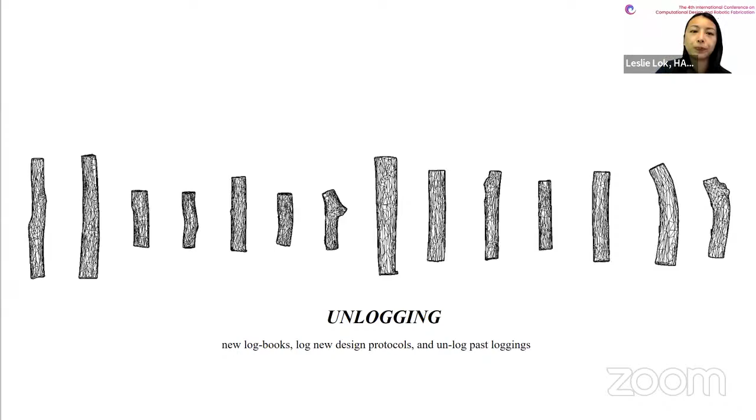And I think new material and design practices are needed to address climate change as one of the most pressing problems of our generation. And moving forward, architects, designers, and researchers need to develop new logbooks, log new design protocols, and fundamentally, in some way, unlog our past loggings in order to move towards a radically more sustainable and less wasteful building culture. So this environmental paradigm shift is accompanied by considerable design opportunities.

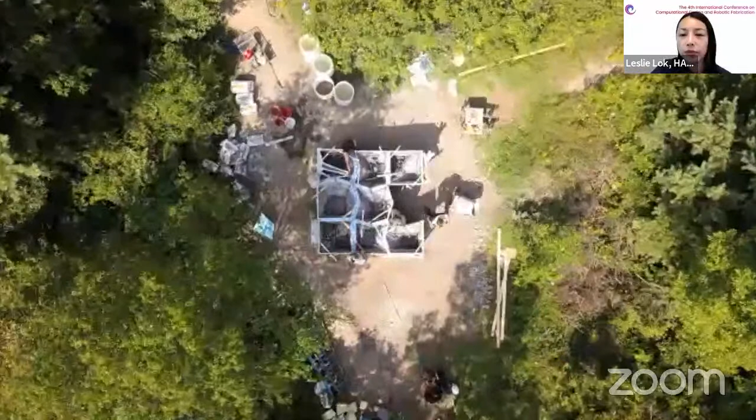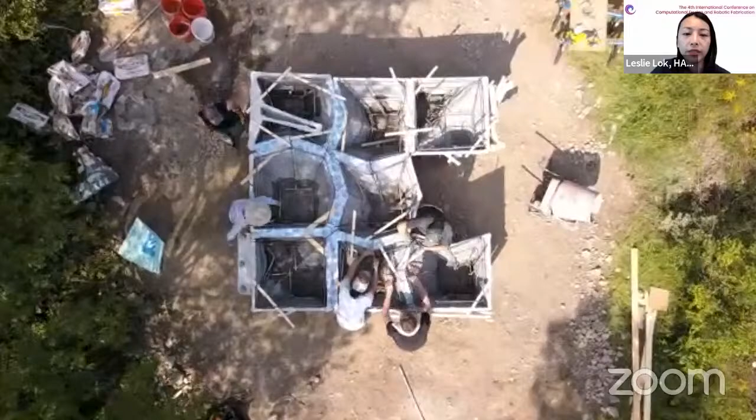We believe that the issues of making and forming are fundamental to how we operate as HANNAH. The various projects I present today are seeking to inform form through a variety of methods of production, from digital design, fabrication technologies, facilitating new material methods, to tectonic articulations, environmental practices, technological affordances, and architecturally expressive forms of construction. So in the past few years, as Philip had mentioned, we have been very productive.

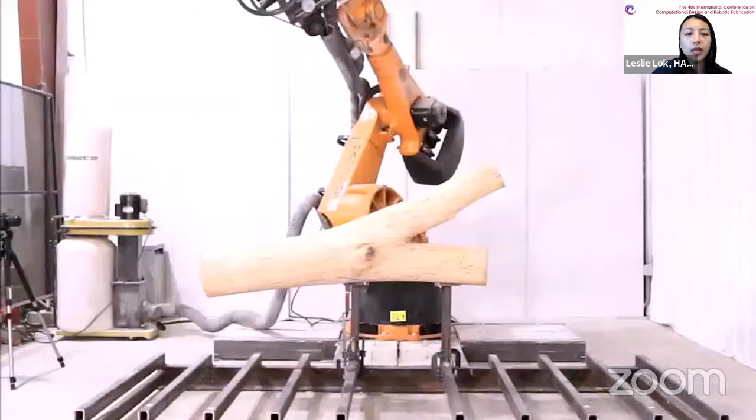We created open source construction machines, which we argue inevitably affect how we think and design through making. So in our work, we aim to mine that tension between the machine means and architectural ends. And we built a small infrastructural framework for architectural exploration across scales, starting from the design of tools to prototypes and installation into a small building. In this process, just like the robot in this video, we have been trying to unlog our own architectural preconceptions and expectations.

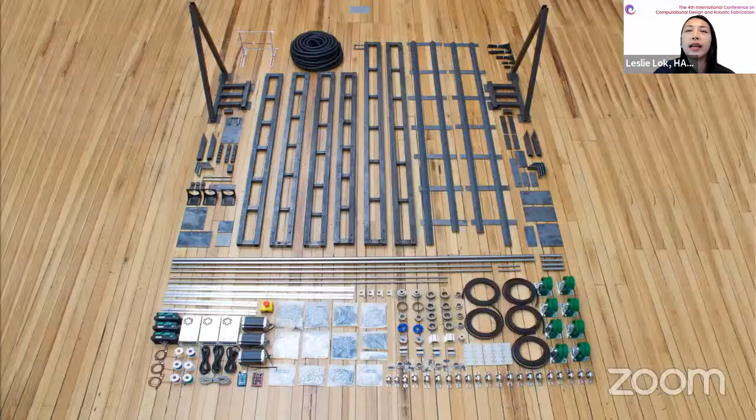And I'll start really quickly with just the tools of making. At HANNAH and our labs, we build our own tools, and these tools inform the designs and how we log our design. So when we started this work, we had to be inventive and build our own machinery to do the type of research that we want.

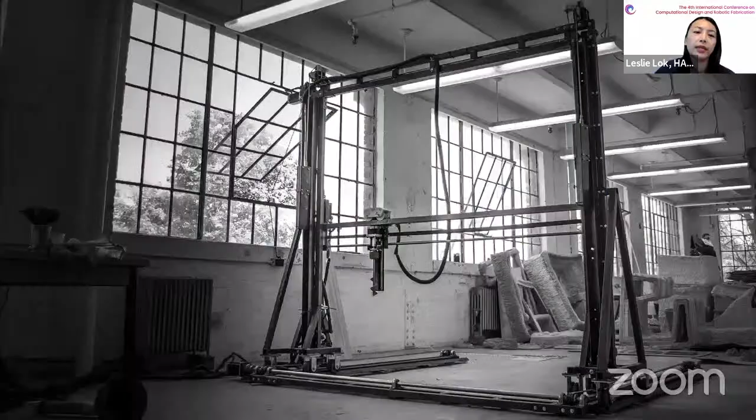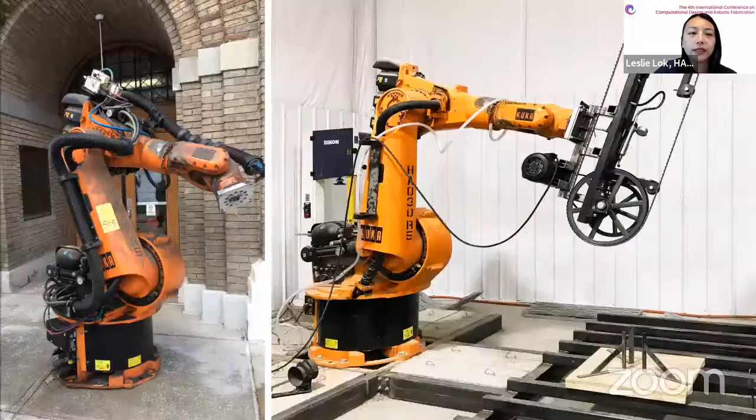And we also tried to buy a robot. As it turns out, one can go to eBay and purchase a KUKA KR200 for $8,000. It is not free, but considerably cheaper than buying a new robotic arm. And so for us, similar to the printer, it requires a certain level of hacking. And for us, this robot enabled us to have another technological means to inform form and new material.

So the first two projects I'll talk about focus on using the printer for 3D printing concrete. In additive architectural elements, we discovered that the 3D printer, a machine which has long been characterized as characterless because it can presumably print anything, is in fact exactly the opposite. It has plenty of character in what we like to call productive constraints. And most of these constraints are informed by concrete rheology and gravity, which we call the two frenemies of concrete 3D printing.

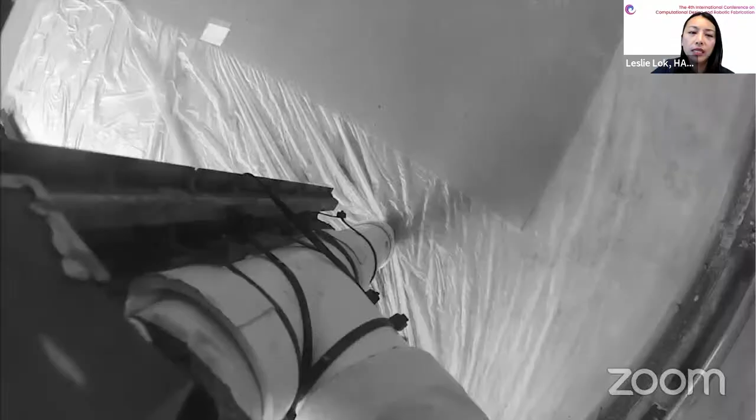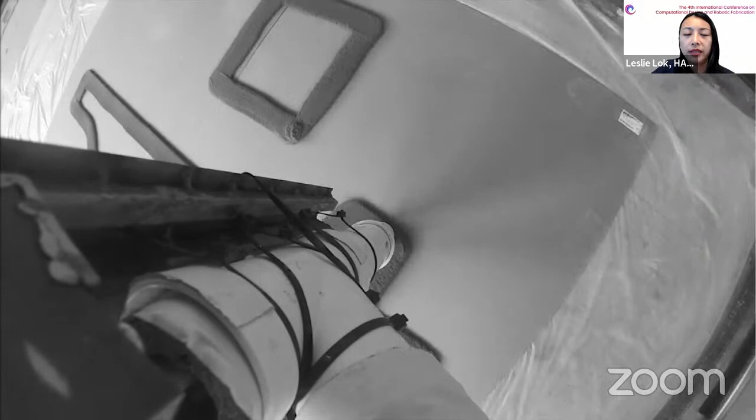Initially, our interest is in the following process. Like a three-dimensional drawing, the machine horizontally deposits one line after another. If the lines are shifted through corbelling, then it creates a spatial form. And so we find that in this very simple process is the complex language of concrete printing. In this project, our main design and research questions are: what is the architecture of 3D printed concrete? And how can materiality and the unique fabrication opportunities and constraints of the tools inform the design?

So we started this project in 2015 and really got the mixture in 2016. So it happened quite many years ago. Building the machine was the easy part, but with the aim of finding out what is intrinsic to the additive manufacturing process, like most people and most labs, we had to go through dozens of failures to understand the material's tolerance and its urge for imprecision.

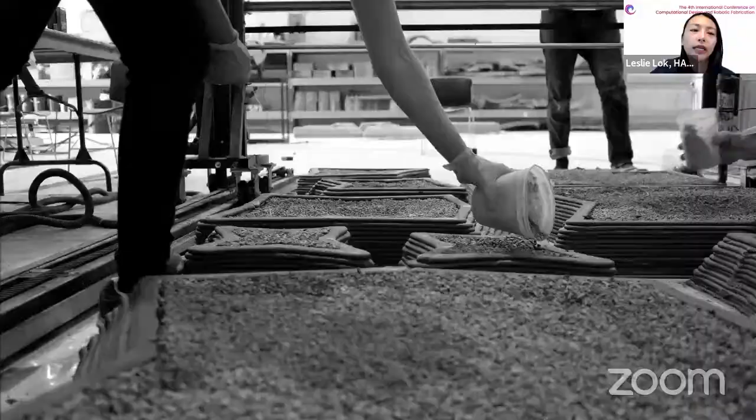Also, when printing in concrete, the same rules apply as in the small desktop 3D printers, but gravity here takes on an altogether different role in the process. So cantilevers have to be carefully constructed, new support material strategies have to be developed, and tool paths have to be manipulated. So in this image, you see where we actually used a reusable gravel method to create temporary supports.

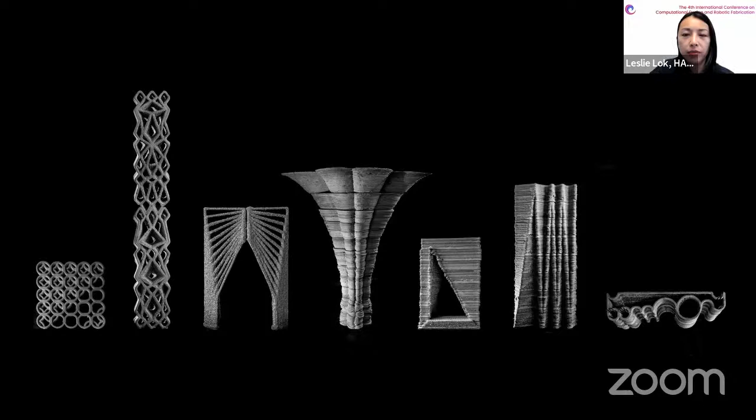From the design point of view, this project aims to reveal the 3D printer's highly idiosyncratic architectural tectonics and narratives. So we chose prototypical motifs like floor, column, door, window, wall, ceiling, and began to strategize how the simple layering of concrete and the act of corbelling can suggest new strategies for building. So in the first element, working with the constraints of gravity, the mushroom column plays with the cantilever over support material by printing upside down.

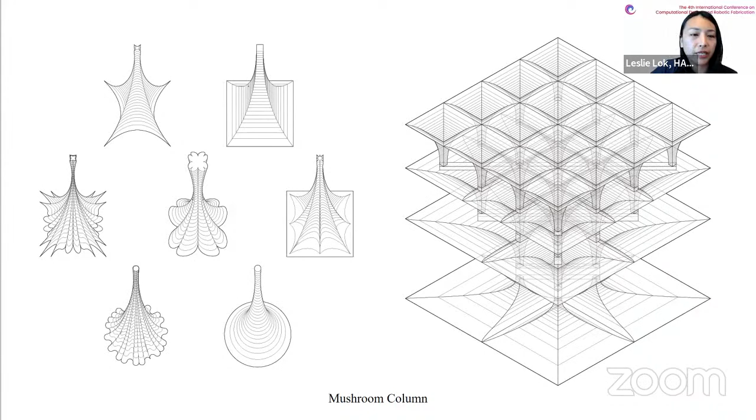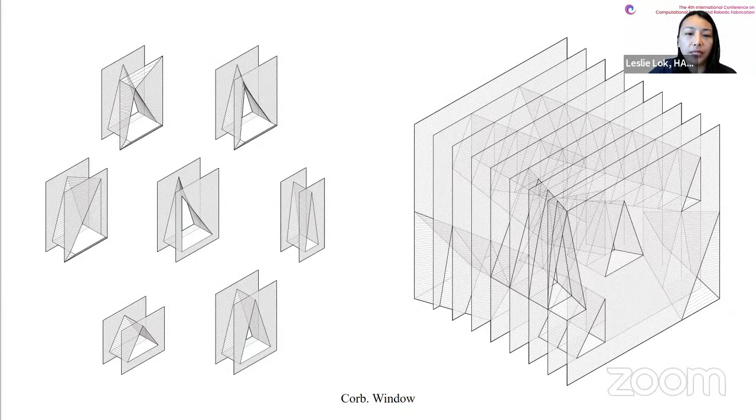And you see here with the horizontal striation, it results in a structural assembly that can seamlessly transition between the vertical and the horizontal. In the 3D printed structure, all common architectural motifs and building components must be rethought to fit the logic of layer construction. For example, a printer cannot print in mid-air. Therefore, the otherwise simple task of creating a rectilinear window opening in the wall becomes a de facto impossibility.

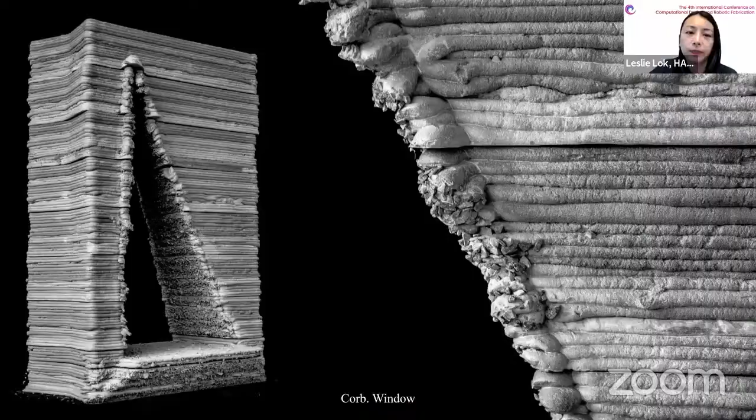So rather than drastically altering the process, stopping the machine to insert a beam, shortcomings become opportunities for design. And one logical consequence for the window is to cantilever incrementally and become a triangular corbelled arch. So suddenly, seemingly advanced technology relies on obsolete and archaic structural strategies such as corbelling. And that was a very exciting moment for us.

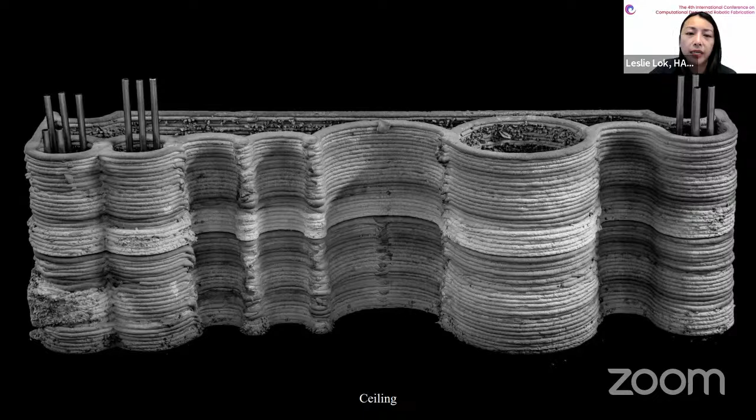Here you see the force column, printed in section, hints at the potential to deposit material where structurally necessary. And the Smart Poché Wall explores the manipulation of concrete density to optimize for structural performance and to be architecturally expressive in the wall assembly. The ceiling element is an expressive play on ducts for ventilation and reflectors for lighting. It becomes a type of performative poché for building systems.

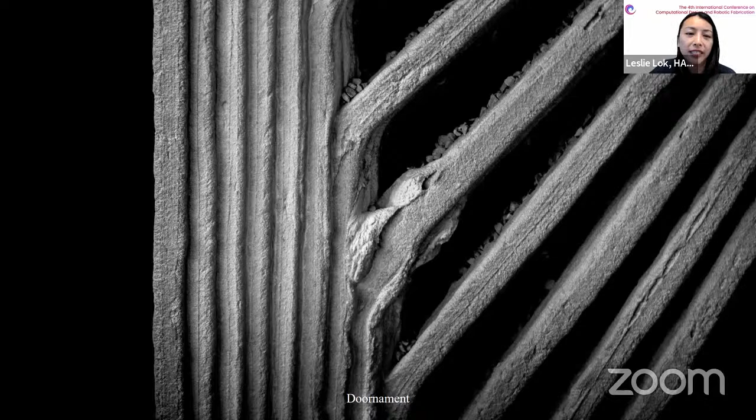The potential for excessive ornamentation is brought up in the door ornament. In the full-scale prototype, we were playing with the lamination of layers to create screen-like moments of transparency. So we see this manipulation of 3D printing rule sets as a tremendous opportunity where it requires the development of a new and different architectural language, which takes into account the limitations of the process as well as its performative advantages.

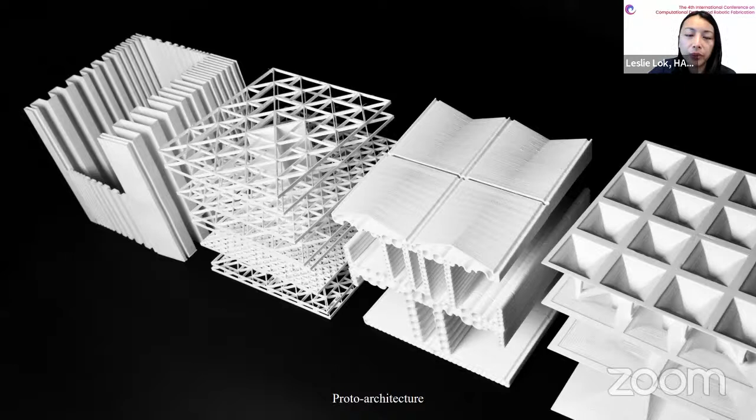There are certainly multiple narratives at play in this project, and we chose to present the work with a particularly speculative focus. We can also discuss the work in various other terms as well. From a technical point of view, there are multiple advantages to 3D printing, from construction without the use of formwork and radical mass customization to material savings for smarter construction.

However, there are severe shortcomings to working with concrete as well. The cementitious material itself has to change and become drastically more sustainable for 3D printing to become a viable future technology or current technology. So while our concrete projects exploit the design benefits of 3D printing, we as designers have a responsibility to dig deeper and constantly challenge the material we work with. And hopefully soon in the future, we aim to replace concrete with more sustainable alternatives.

And to conclude this project, I want to say that undeniably there's a certain formal agenda at play here. And that agenda is derived from highly deterministic bottom-up processes that are informed by the digital fabrication, and also top-down architectural decisions, which are perhaps harder to quantify and have something to do with our personal biases and design preferences. In other words, this is not a universal tectonic language.

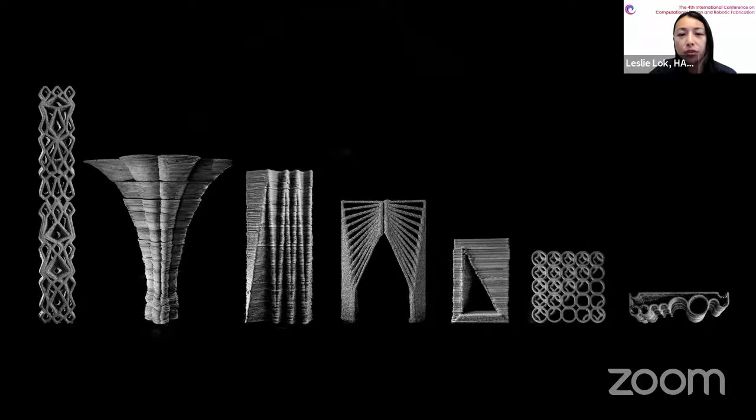We also try to test out ideas across scales, and we're quite interested to see how certain intellectual frameworks change and transform while translating from one scale to another. So the idea of robotic mass customization inspired our Rolling Stones project, which was a winning entry for the Socrates Sculpture Park and Architectural League's 2018 Folly competition.

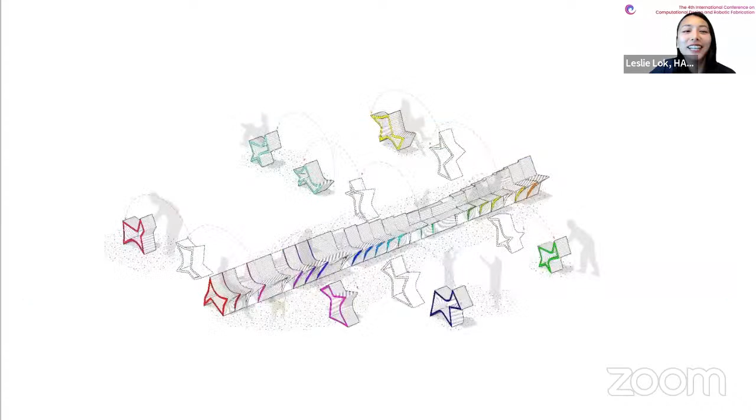The design is deeply informed by program, in this case, public seating. And the brief called for a design that could be movable by visitors and staff, but solid enough that people are discouraged from removing it from the park. So with concrete gravity working in our favor this time around, we got the second part covered from the get-go because they're hard to steal. Leveraging movement architecturally, the follies themselves, the chairs, the playful design encourages creative interaction and allows park visitors to discover a variety of seating.

Responding to the scale within the public park landscape, the Rolling Stones can form a long continuous bench object or aggregate into smaller benches or disperse entirely to form different size seating groups or solitary compositions. And 3D printing with concrete enables the creation of 25 affordable and self-similar, but ultimately entirely individual seats. And so no longer bound to the relentless paradigm of standardization, the 3D printing here opens the possibility for design freedom, customization. And as you can see in this photo, concrete is indeed hard to steal or roll, but with two people, it's actually quite okay.

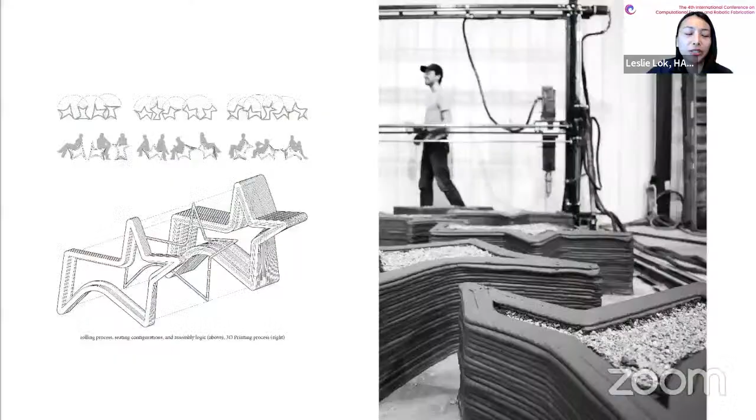The material used in the 3D printing process is Portland cement-based mortar, which is reinforced with nylon fibers, resulting in a strong concrete assembly. In addition, each seat is supported by 3 steel rebar profiles embedded within a double layer of concrete, as you see in the photo. And to enable the creation of some of their cantilever forms, the seat's interior is supported with a bed of gravel during printing. A layer of gravel remains imprinted on each chair's interior surface, giving it a geologic character, also an honest reading of the fabrication process.

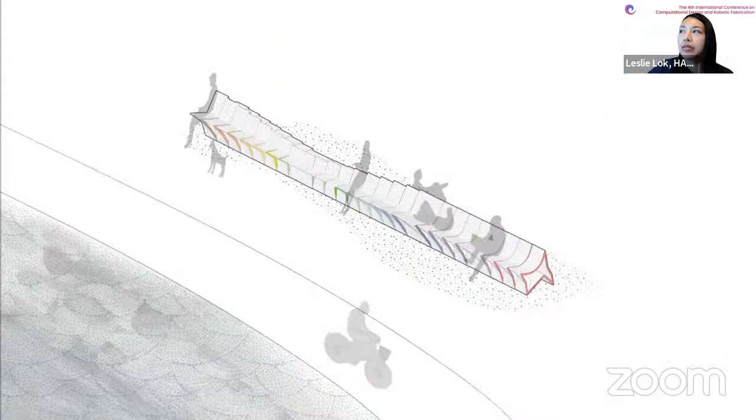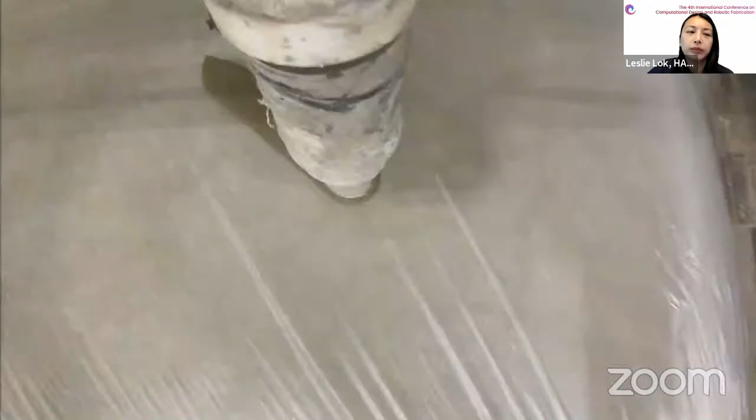And so here is a short video clip showing the making of the Rolling Stones from some of the initial prototypes that you see here to the material testing and fabrication process. And so the idea of the bench, the seating could be contextualized and used in different ways at the park. So the printing is, again, very simple, using the sort of singular extrusion layer by layer. And you can see that the printing itself is not an autonomous process, but rather it's like an interplay between the human and the machine.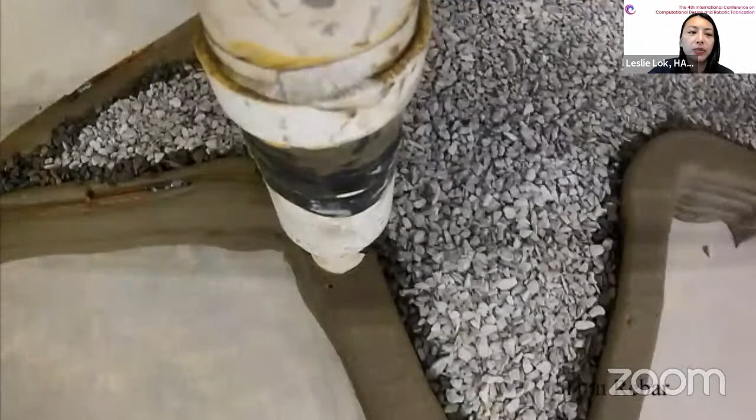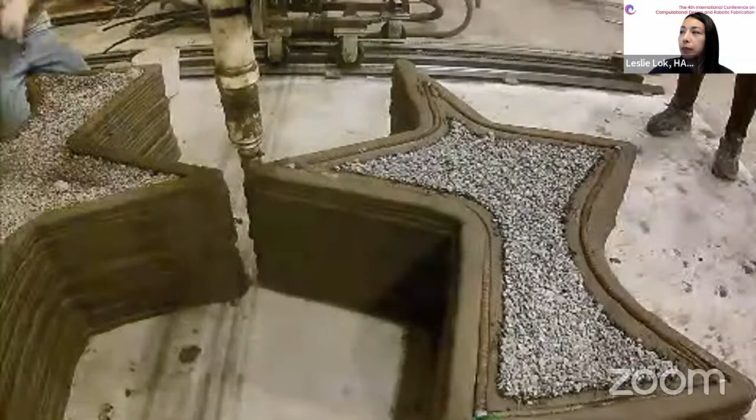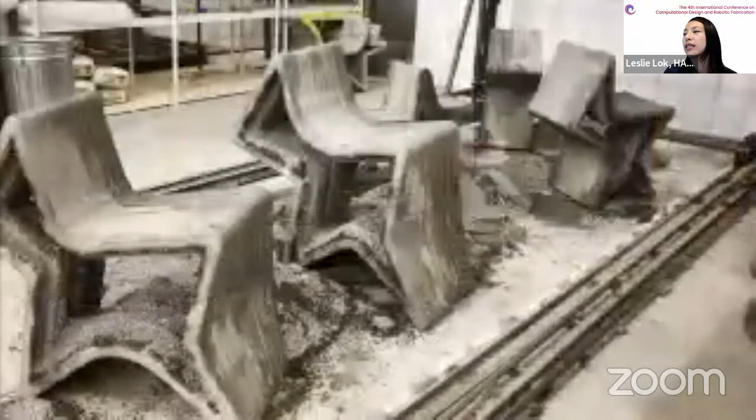And for reinforcements, we've tested different types of reinforcements, from steel rebar to hemp fiber to steel fiber to fiberglass. And in the end, we ended up going for steel rebar. And here you can see the printer printing the double layer with the rebar profile embedded. There are 3 rebars in each seat to prevent it from breaking, as it's public seating. And so there's, again, us dancing and working with the machine together. And here is the printed form. So it takes about a day to print 8 seats.

And here, of course, it does depend on the project, how much we print per day. And here's some material testing, and that was installed at the Socrates Park in 2018. Since then, it's been moved to a couple other places.

And the next project is Whispering Wall. So the Whispering Wall is a project by Rural Urban Building Innovation Lab. And it looks at the explorations of using non-standard and non-uniform material with augmented reality and mixed realities. So this project focuses on upcycling non-standardized wood elements to create a customized structural wood system. And so with this project, we shift to another material exploration, in this case wood waste.

The project design narrative consists of 3 main aspects, and the first is using salvage material. Wood accounts for around 10% of all material deposited in landfills annually. And the project used this reclaimed wood, actually wood boards from a collapsed barn in our region, for a more sustainable approach in building practices. And here you see the reclaimed wood was processed with initial cleaning and marked.

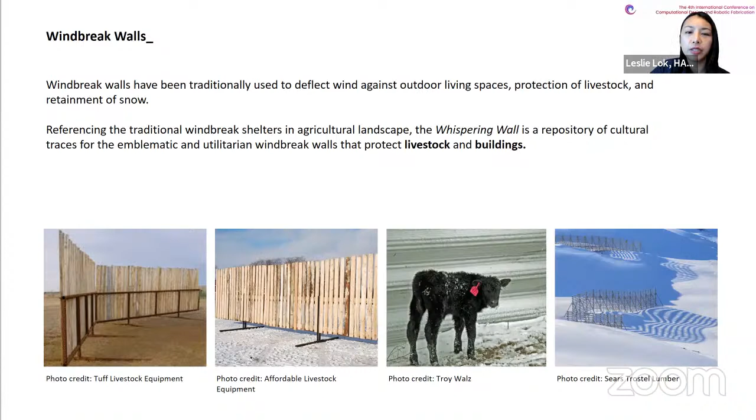The project also referenced traditional windbreak shelter in agricultural landscape. The Whispering Wall is a repository of cultural traces for the emblematic and utilitarian windbreak walls that protect livestock and buildings. And the design explores the coupling of AR with these non-uniformly sized wood boards to develop a digitally informed and customized hollow core CLT wall assembly.

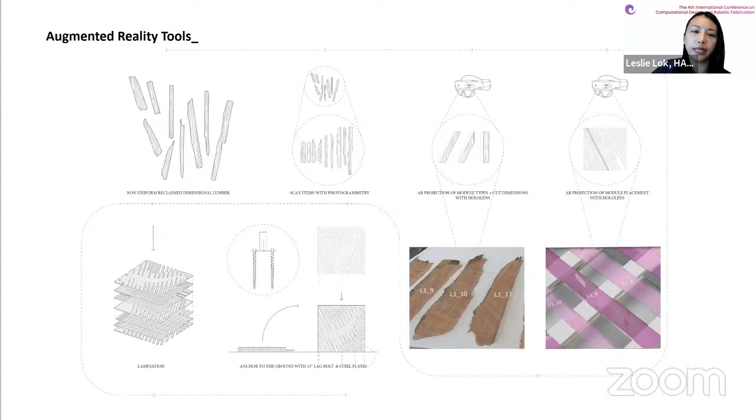So you see the process here outlines the wood source, and they were scanned and processed with AR and MR tools and assembled and fabricated in that way as well. So first is a material exploration in CLT. The installation introduces a customized hollow void core that is enabled by computational technology to reduce material use.

And so the initial design started with the wind analysis, given its function as a windbreaking wall, looking at the local wind rose, direction all season, and then doing CFD analysis of the walls with the wall's new geometric configuration to see how it responds to the wind from the predominant directions.

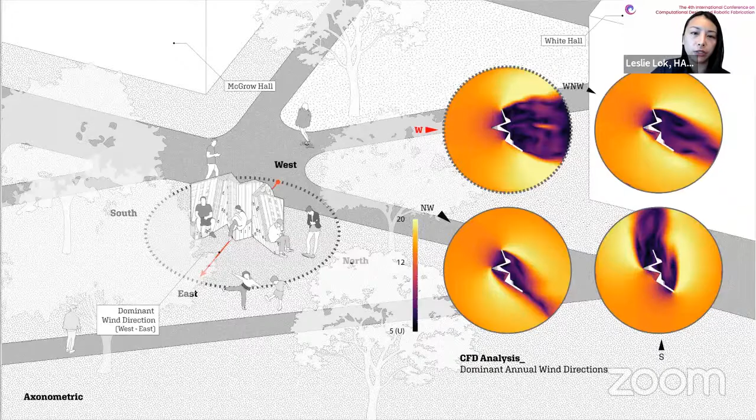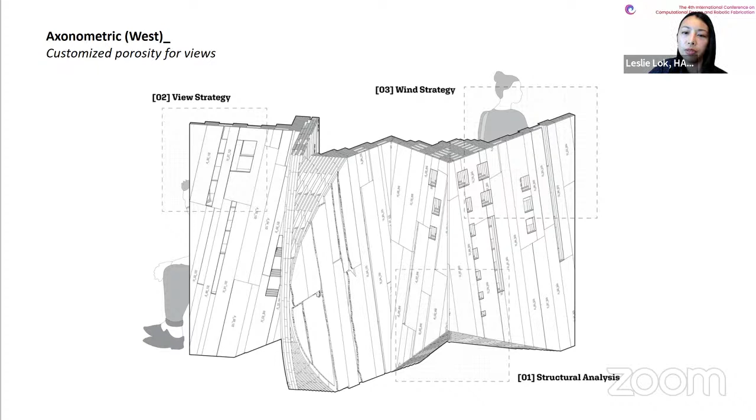And by selectively reducing core timber to optimize the void volume, the installation saves construction materials and leverages the cavity as a design parameter. And the structure adopts multiple design parameters to customize these panels, such as structural performance, wind deflection, and view interaction to inform its thickness and porosity.

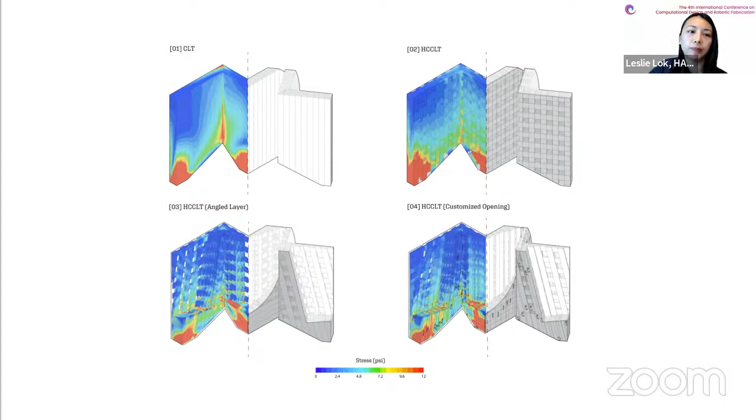And here you see the structure analysis series that it went through, from the solid to a generic void to a customized void, and a varied number of layers of thickness and thinness. And at the end, the project has a void volume of about 30%, so material usage was reduced. And so here's a close-up of the installation, showing some of the more regularly spaced and also irregularly spaced conditions. And this is the installation on site.

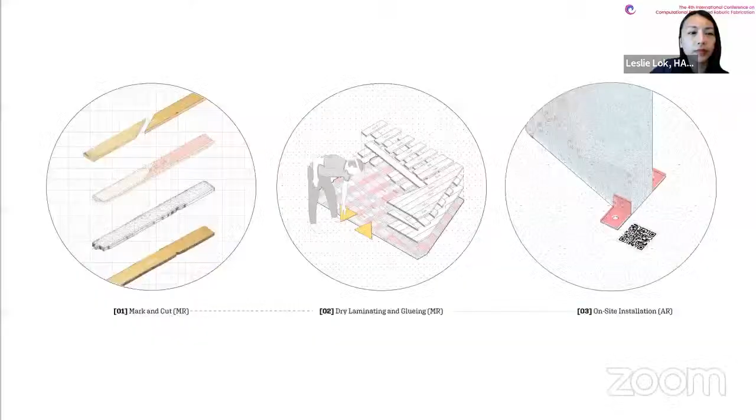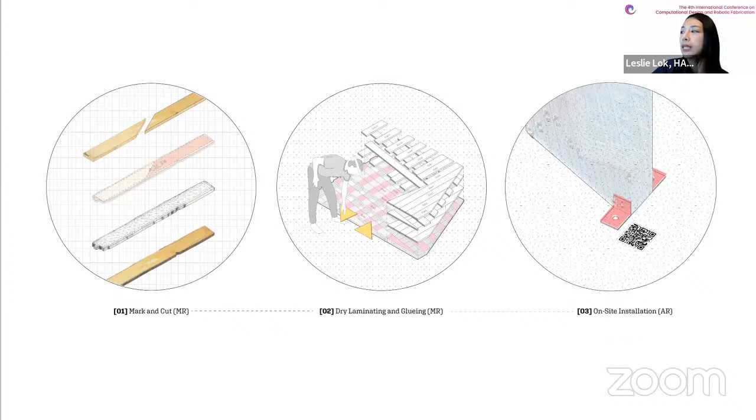And to speak a bit more about the AR and MR informed processes, there are mainly 3 steps. One is processing the material, which entails the marking and cutting. And second is the assembly and fabrication, which entails the dry laminating and gluing and on-site installation. So first, an MR guided material process is used to provide a user-friendly working interface to upcycle locally sourced wood waste. And this visual guidance, projected through the HoloLens, allows users to intuitively engage with the material's irregularity.

And so you can see in the drawings on the left, the boards are sorted according to their thickness, and the maximum usable rectangular areas are computationally calculated and sorted. So that allows us to maximize the usable area of the wood boards that we source. And this drawing shows the semi-automated wood piece tiling process. It starts with an automated process, and then manually by selecting pieces that can be also reused for other parts of the boards.

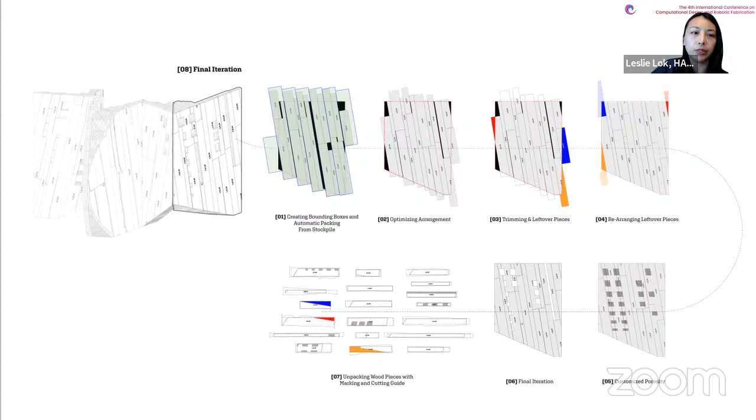And in the MR guiding process, after being digitally recalibrated to maximize the usable area, you can see here the visual development allows us to understand which part to use, which part to cut, and which part to save. So every graphic element is different, whether they're opaque, solid, and whatnot.

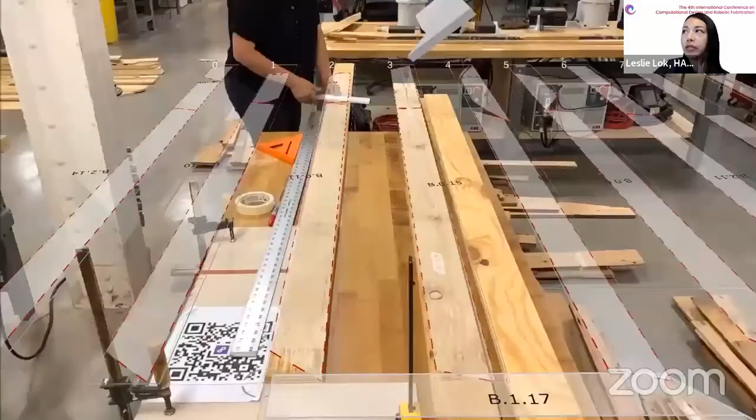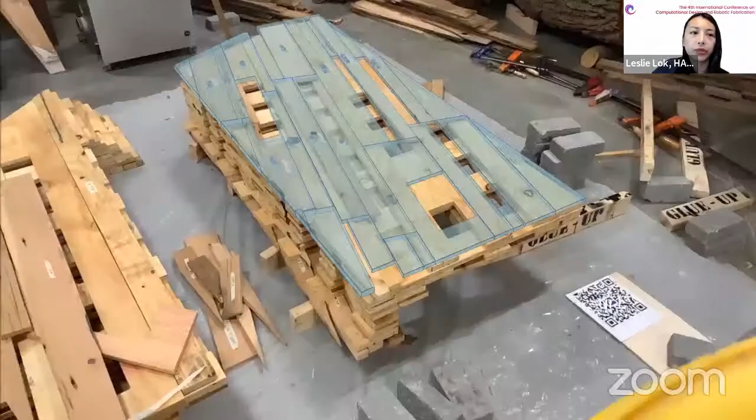In the mixed reality guided laminating process, users can first dry laminate each layer to check for geometric and dimensional accuracy, and also for initial dry laminating for more complex pieces. And subsequently, each component is laminated through the holographic gluing position, as you can see in the video, because as the spacing changes, the gluing position also changes.

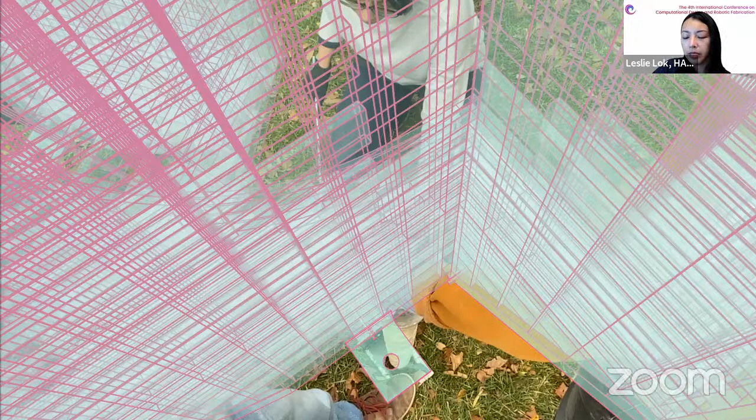And lastly, the AR side of the function helps us situate the position and orient the installation on site, as well as immediately place where the foundation anchors, the ground anchors, would be. And so in this project, similar to many contemporary digital, AR and MR projects and processes, we didn't use any drawings. And here is another picture of the installation.

So moving to the next part, I would like to just highlight a little bit the material that we use for the next two projects, which is the emerald ash borer infested wood. We call it a morbidly sustainable biomaterial.

The invasive EAB threatens to eradicate most of the 8.7 billion ash trees in North America and has drastically transformed the entire forest ecosystem in the process. And as of October 2018, it is found in 35 states in the US and several Canadian provinces. And this is something that we encounter actually in our backyard. So that's how we actually came to learn about this

epidemic. So what you see here, this beautiful bug, the emerald ash borer, is actually much tinier in real life. They look huge on the screen. It's a small beetle whose larvae hatch underneath the tree bark and cut off vital layers that transport nutrients within its trunk. And as a reference, almost every 10th tree in New York State is an ash tree.

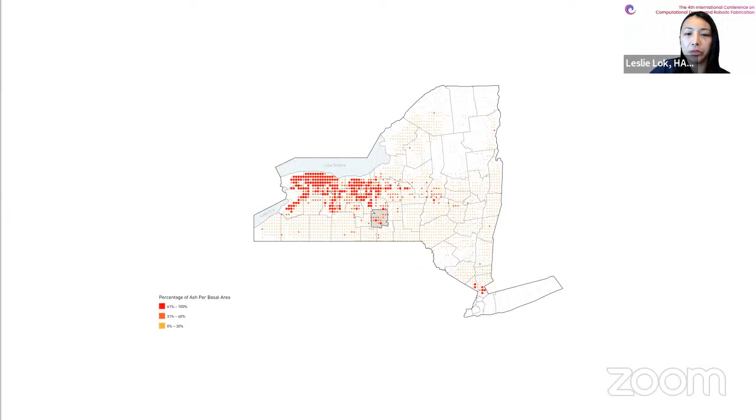So while we as designers cannot help the dying trees, we believe that the infested trees form an enormous and untapped material resource for sustainable wood construction. And what you see here is an image of the Arnot Teaching and Research Forest at Cornell, where all our wood comes from. The EAB arrived here in 2018 in our backyard, and it is the source for all of our ashwood projects, including the next two projects that I will talk about.

So first is Unlog. Conceptually, Unlog investigates how far a singular log can be stretched, both literally as an assembly and also figuratively as a resource. The research focuses on the development of a lightweight and easily deployable timber framing method, utilizing robotic kerfing techniques to transform the EAB-infested trees into a material efficient and valuable resource. Unlog uses logs that can unfold from a line, a column, to a surface, loosely referencing and reinterpreting the American tradition of wood framing.

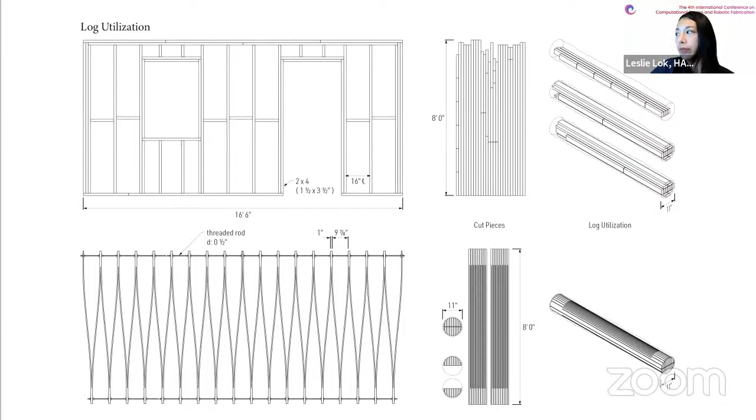And what you see here in this drawing is the log utilization comparison of framing using dimensional lumber compared to the stretched robotically kerfed logs. And we ask ourselves, can we make this method of construction more efficient with framing? Can we use decaying hardwood to rethink framing techniques? The full log kerfing method was initially developed by Savannah Chase and Hawk in the Timber Villa Option Studio at Cornell in 2017. So the diagram here illustrates the geometric relationship between the uncut margin of the component and its transformation of spacing.

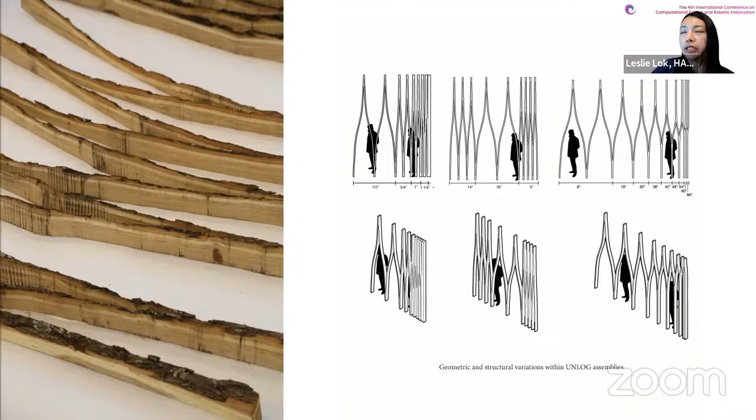So the image on the left is an initial test that we cut at a workshop at UVA. This method enables the simple creation of a bending active structural component with a material integrated hinge, as you can see in these drawings. And it also has very interesting characteristics because depending on the distance you spread, the top and bottom edge would also change in height. And so cutting the end to anticipate certain deformation could also be an interesting parameter to consider.

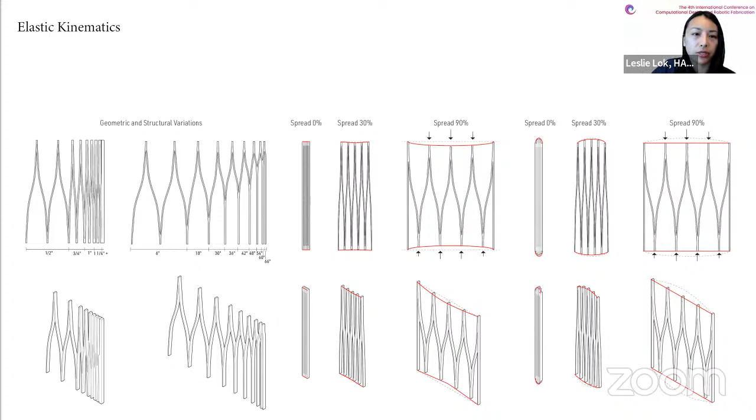So for this project, a comprehensive method for full log kerfing was developed. In woodworking, kerfing is reliant on a relief cut technique that is used to induce flexibility into a material, and is often applied to sheet material to generate surface curvature. However, kerfing here is used in an altogether different capacity, and the project employs a method to robotically kerf a log along its length using the alternating cut pattern as you see in this GIF, so that the log can begin to unravel from a volumetric round wood into an operable leaf spring component. And this constitutes the overall structural logic of the system.

The zigzagging logs can also be used to create braced structural assemblies and propose a new transportable and zero waste construction method. So a large variety of natural log geometries, whether straight or curved, can similarly be sliced and kerfed using this framing method. As you can see here, we have the regular straight logs on the left, curved, and we can even begin to optimize the thickness of the cut of the kerfing geometry to allow for an optimization of structural performance. For the Unlog installation, we use the regular kerfing geometry.

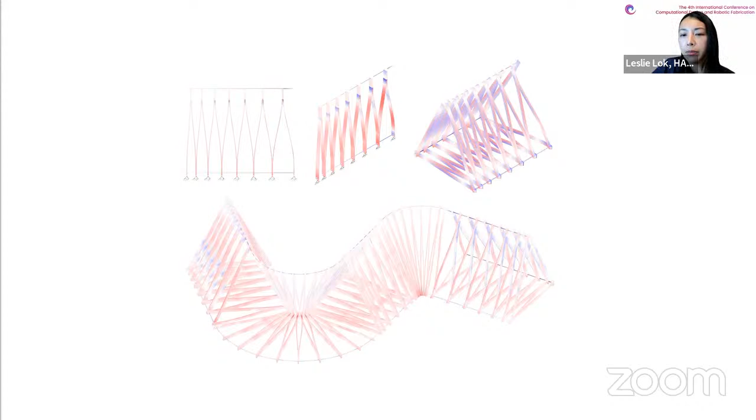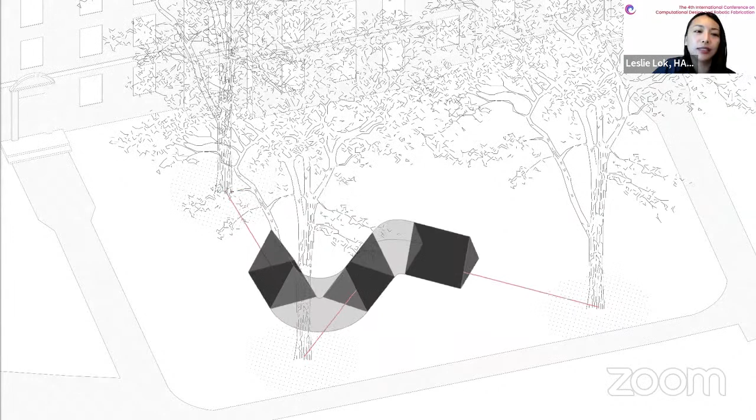And so that was the sort of material and structural investigation just now. And then to consider the site, we were exploring the three trees. There are three huge, beautiful trees on site. So we decided that the spatial A-frame should strategically frame the three large trees on the installation site to engage with the context. And so this is the resulting spatial configuration where each log is oriented and frames a view centrally towards one of the trees.

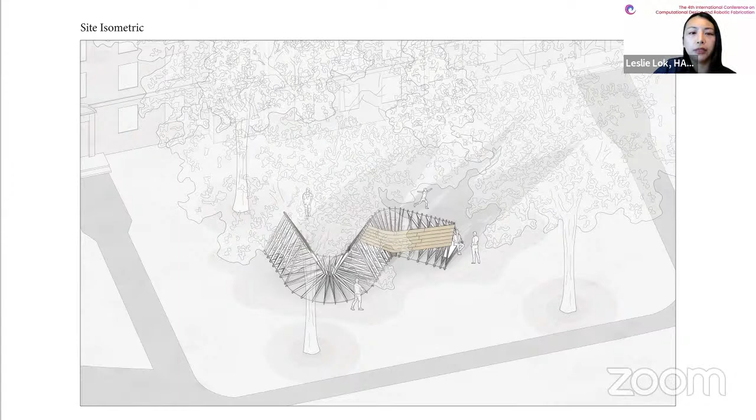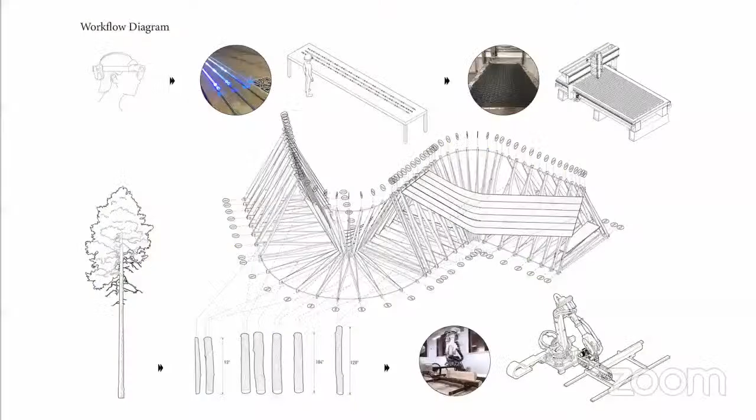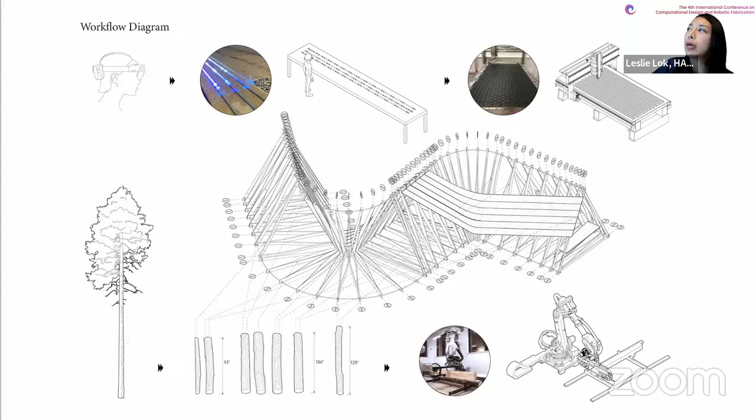And so to then present the overall workflow, it's actually fairly straightforward. We sourced our logs from Cornell grounds with mature ash trees. We use mostly straight elements that are compatible with current logging protocols. And the process involves AR and MR to facilitate certain parts of the assembly processes. We also CNC milled custom slip washers, and the woods are robotically carved using our facilities at Cornell.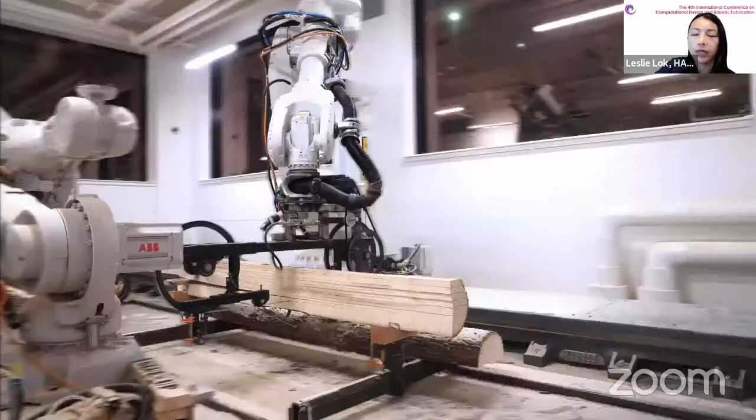So in the first steps, the logs were cut in half along the longitudinal axes with the robotic arm, the 6-axis, with the bandsaw end effector. After each profile was cut, the log is rotated 90 degrees and mounted on the robotic cell and starts to make alternating cuts. Also using Twinbuild, the AR interface was used to instruct the assembly team on the location of the timber members and therefore their hosted threaded rods.

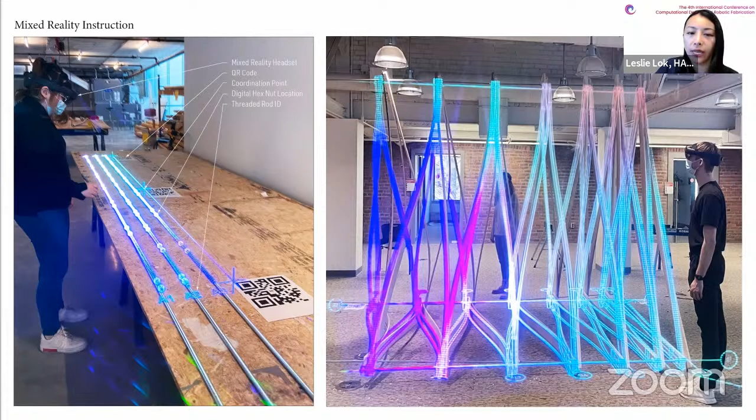And through this prototype, on the right, you see that we built a full-scale prototype, and it actually helps us to understand the misalignment between the digital and physical models, because the physical mock-up reflects the actual bending property of the curved log much better. And so we were able to then use the physical mock-up to update our digital studies accordingly. And so AR was used to inform and modify prototypes and therefore enhance the digital models accordingly.

And so this is how the installation arrived on site. 6 logs. We have an extra log for the gallery exhibition. And with all its hardware, ground anchors, the entire structure weighed less than 2,000 pounds. And here's a photo showing near the end of the assembly, we were putting together the sheathing.

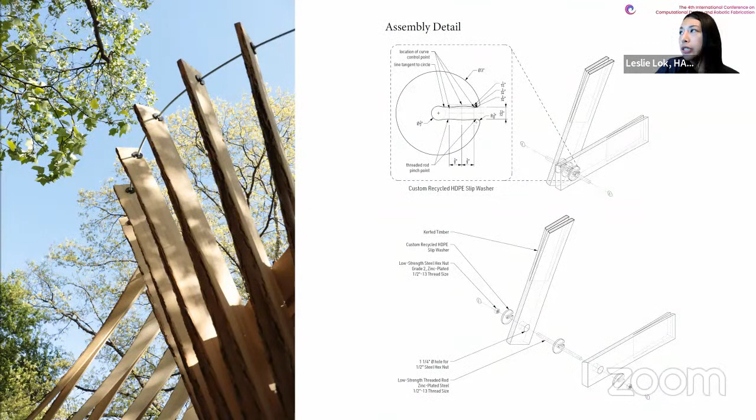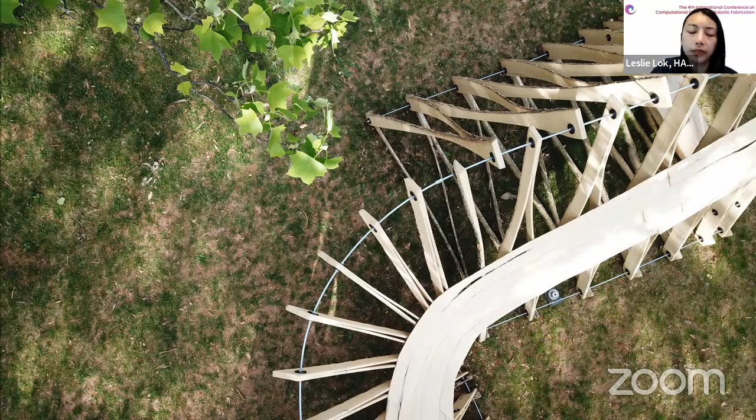Here is an image that shows the assembly detail, illustrating the assembly sequence and the custom slip-on washers that we developed specifically for this project. And here's another view showing the relationship between the threaded rod, the washer connection, and the robotically curved logs. And on site, it creates this curvature that then creates a space that looks towards the street and a space towards the building.

Materially, because of the process, one can start to see it has both the clean, precise edges from robotic fabrication tools, but it also retains the raw and natural edges and qualities of the bark of the logs. And the image on the left shows these robotically sliced ash boards. They're about 2 millimeters thin, that we use to create the sheathing. And here's a corner detail of the radially curved connection.

So the installation has now found, after the installation, a new home at the nearby art gallery and community garden. So the video shows the installation at its original site. And this project, from unlog to log and back, because it was disassembled and reassembled again, the structure can be easily moved and reinstalled, thus presenting an easily transportable, deployable, circular, and minimal waste construction method.

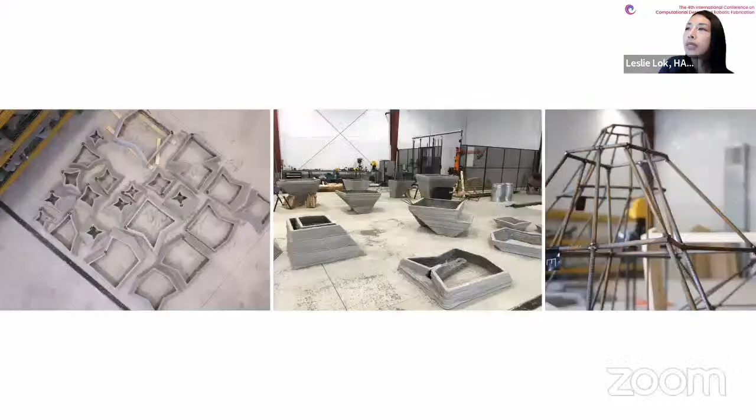And so the concrete structure is printed in components that function as sacrificial zero waste formwork for the main structure. They are printed in small sections, transported to site and manually assembled, as the site is in quite a remote condition. So here you see some of the printed pieces and the custom rebar cages for some of the legs.

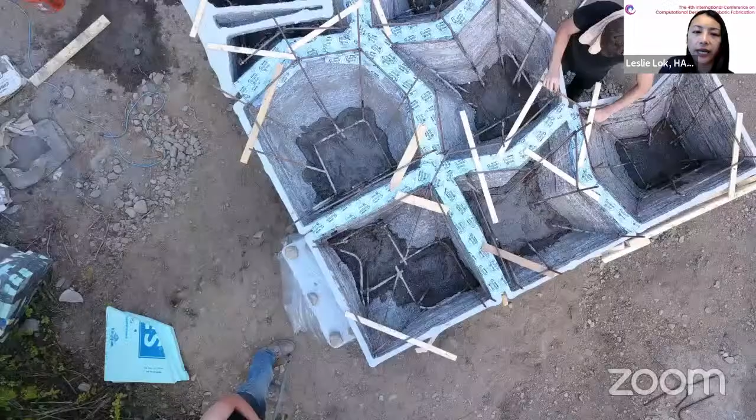And then here's a top view of the site before anything else was there and the initial components being on site. So we developed a hybrid construction system where 3D printed formwork and cast concrete with custom rebar is used to provide the main structure. Each leg is filled with foam in the void, and concrete is poured in between. And here you see the base and the chimney going up.

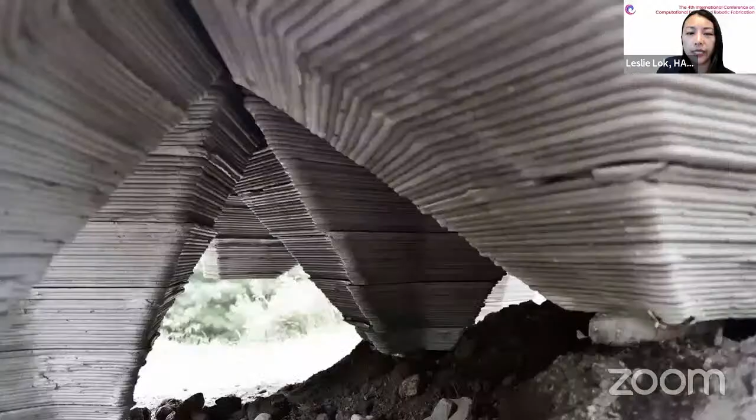And the slabs are organized in a 9-square grid, reflecting the interlocking pattern of the legs beneath. In this hybrid building process, tectonic expression is generated by the fabrication method and materiality. For example, the G-code here and the print path becomes visible as the ornamental pattern of the 3D printed floor slabs. And corbelling is achieved through sectional transformation to become an expressive and functional motif, allowing the horizontal layers to seamlessly transition from the leg to the slab and into the chimney above.

The resulting concrete structure lifts off the ground and is characterized by 3 programmatic areas: a table, a storage seat element, and a 7-meter tall working fireplace. And so this was designed and constructed in the span of one summer in 2017.

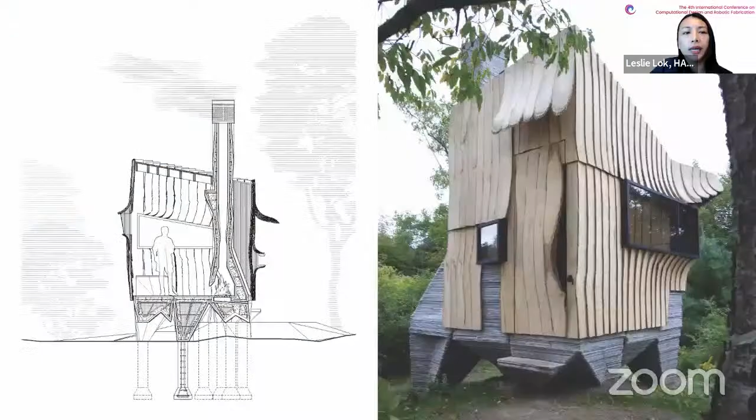And so the second part of the cabin is actually really informed by the emerald ash borer epidemic. And we were thinking how we could use this material. So due to their geometries, many of these infested ash trees cannot be processed by regular sawmills, and they are regarded as unsuitable for construction. So challenging preconceived notions about material standards and woods, the cabin utilizes these infested trees for its envelope, which unfortunately are widely considered as waste or mostly used as firewood, releasing carbon back into the atmosphere.

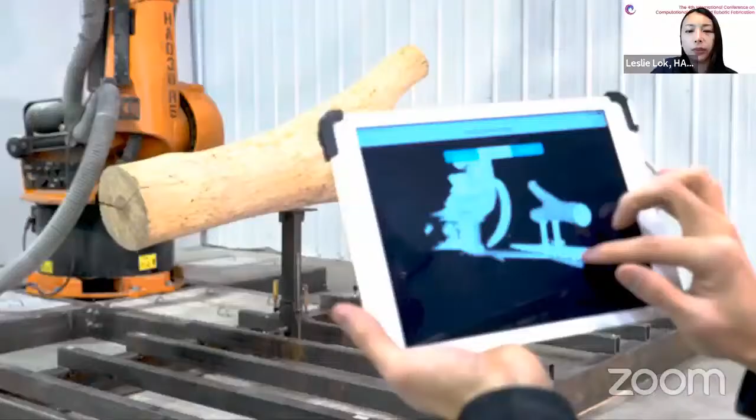We developed a process that involves 3D scanning with our custom robotic platform to transform irregularly shaped wood into an abundantly available, affordable, and more sustainable building material for the Anthropocene. So with this method, we can slice irregular tree logs into naturally curved boards and strategically assemble the boards to form different surface conditions. Ironically, in order to advance environmental resiliency through architecture, we use resources that themselves were not resilient enough.

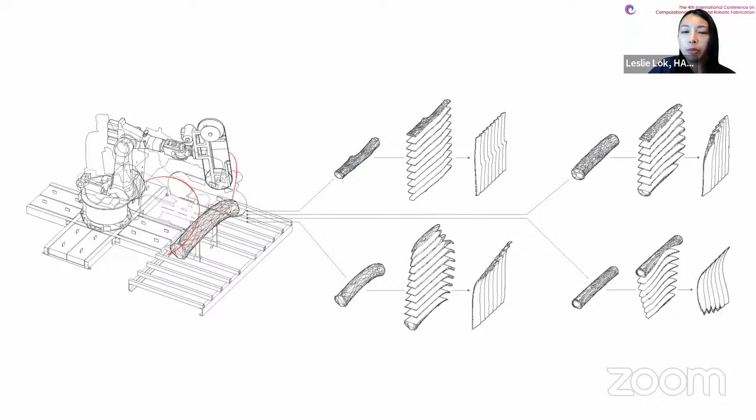So by adjusting the thickness of each cut, the robotically carved boards can be assembled into single curvature or double curvature surfaces. The trees were selected based on log diameters and curvature features. And the selection that you see here for the cabin presents a normal cross-section of available geometries that fall within regular parameters of the tree growth.

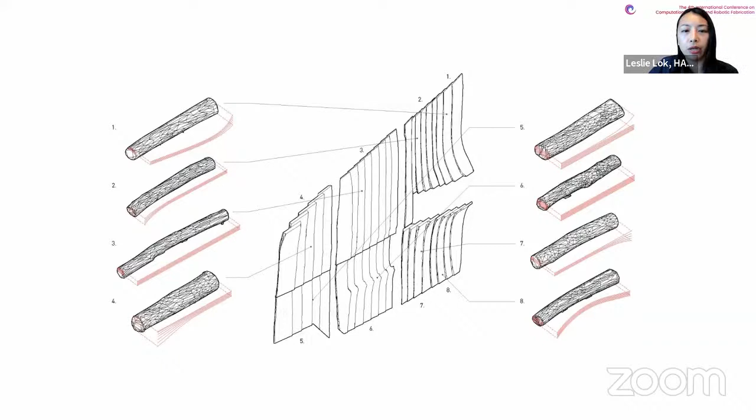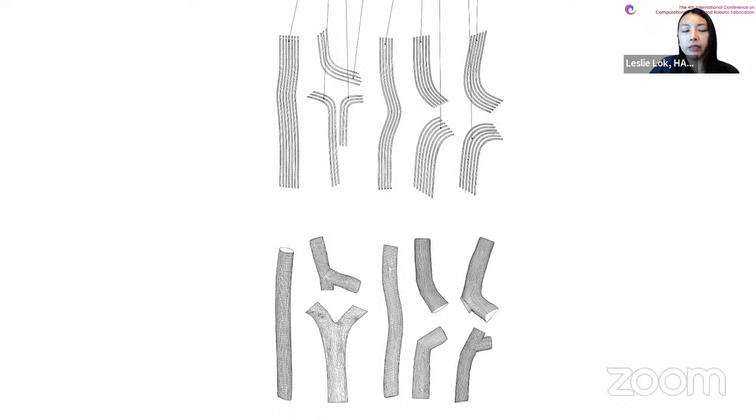And so to process and design with the logs, geometric form finding and assembly protocols from form to log and log to form were developed, which allow us to toggle between the original design, the material, and feed that back into refining the overall structure and form. And here in this image, it shows how the logs can be sliced with different thicknesses. The sliced boards are then arrayed into interlocking SIP facade panels.

It follows the logic of a structural insulated panel, essentially an inner and outer layer of ash boards and a spray foam section. And when we do build a building, despite this small scale, certain disciplinary problems such as questions of joinery, material connections, proportion, and performance begin to re-infuse our discussion. And so as you can see here, the facade is then a fully ventilated detail to manage shrinkage and does not require an additional rain screen. The end result of this constant negotiation is an unfamiliar hybrid between digital and the anachronistic processes of construction.

Returning to the point, oops, can someone mute themselves? I can hear ya.

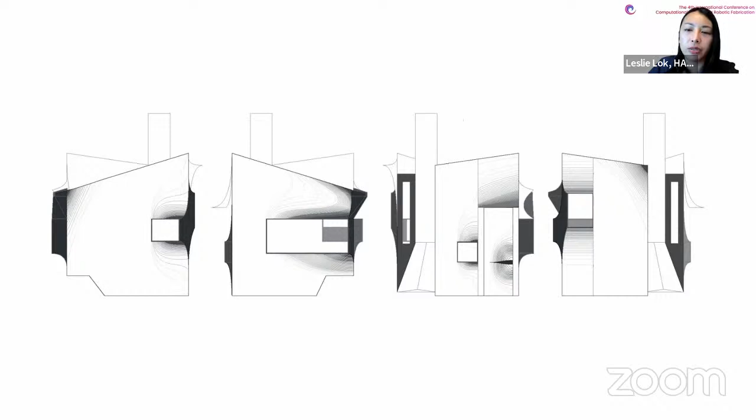And so architecturally, Ashen Cabin walks the line between familiar and unfamiliar, between the technologically advanced and also formally elemental. The undulating wood surface is strategically deployed to highlight moments of architectural importance, such as windows, entrances, roofs, drain scuppers, or canopies. And on the inside, we use predominantly straight ash tree sections to create a contrast between the exterior and the interior. And also the height of the panel layering corresponds with the openings that we create, whether it's looking into the landscape or looking into the building.

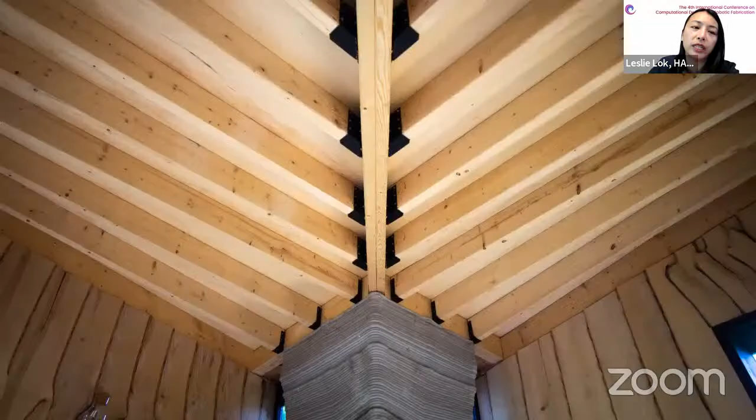So no longer bound to the paradigm of timber standardization, such as 2x4, this project revisits woodcraft and design based on organic found and living materials. While transformed, the natural tree remains legible in the design. And the cabin combines a variety of fabrication methods, material applications, geometries, and types of constructions. And here's an interior view showing how conventional framing of the roof with 3D printing and robotic wood all come together.

Both rigorously and playfully, the research in robotic timber fabrication and concrete 3D printing embraces a complex set of layered design narratives, leveraging technological advancement to reduce material waste and to encourage the comprehensive usage of resources in architectural projects. Fully unpacking the manufacturing process from the ground up thereby presents an exciting opportunity for architects and designers to reclaim authorship over new processes of construction, which influence what we can build, how we can build, or perhaps even how we ought to build in the future.

And so again, multiple narratives, whether they're ecological, technological, or architectural, are unfolded in the various projects. So with this image from the Unlog project, going from the unlog back to the log, I would like to end this presentation. Thank you.